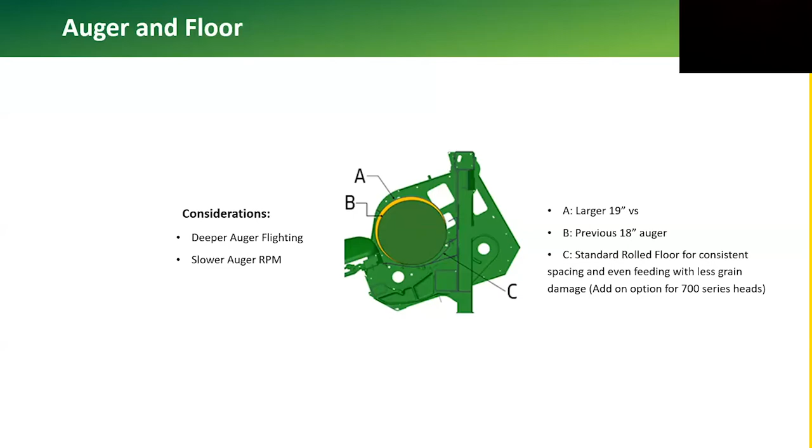Also, the auger turns slower than the older models for less grain damage, but still has the capacity for bigger acres per hour. Active end fenders will reduce ear loss in down corn and can be turned on or off from the cab as needed.

Also, easily raise and lower integrated end fender extensions for standing crops or down corn as needed. The redesigned frame-in-frame fold gives a lower profile and better visibility than previous models. Fold and go in less than 1 minute is a great time-saving feature.

Lighting enhancements include LED stubble lights, end shield lights, and lighted outer gathering points for less fatigue during those long dark nights of harvest. Factory integrated stalk deflectors feature easy installation, less added weight to the head, easy adjustments, and a reliable spring downforce.

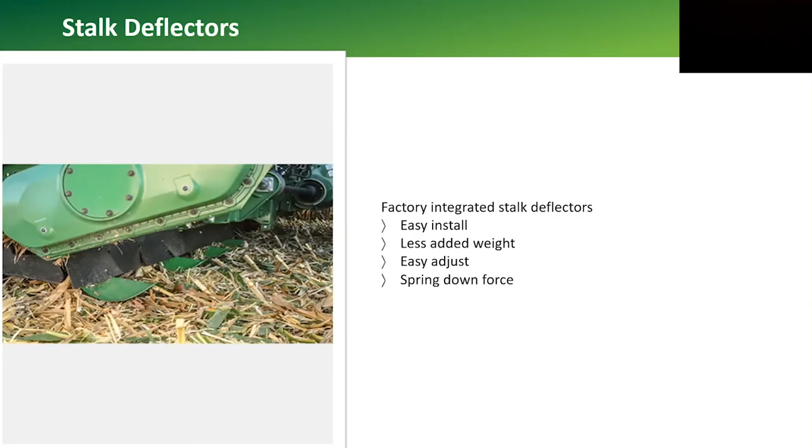The head we had for this demo was a non-chopping head with RowMax chopping stalk rolls. Residue sizing with these rolls is 50% of the material or more being sized to less than 6 inches, which creates less crop mat than a chopping head does, and a blossomed stalk top for fast decomposition while requiring less power than the full StalkMaster chopping head.

This may not be the best option for everyone in West Central and Central Minnesota, but may be a good option depending on the tillage practices and crop rotation, especially if horsepower is a limiting factor on your combine.

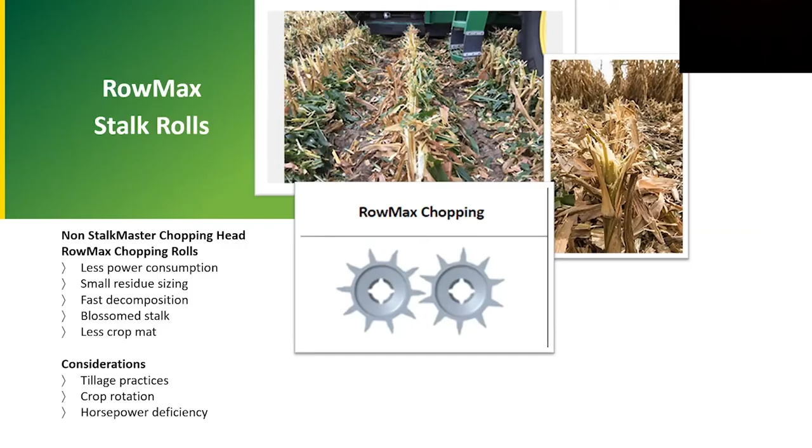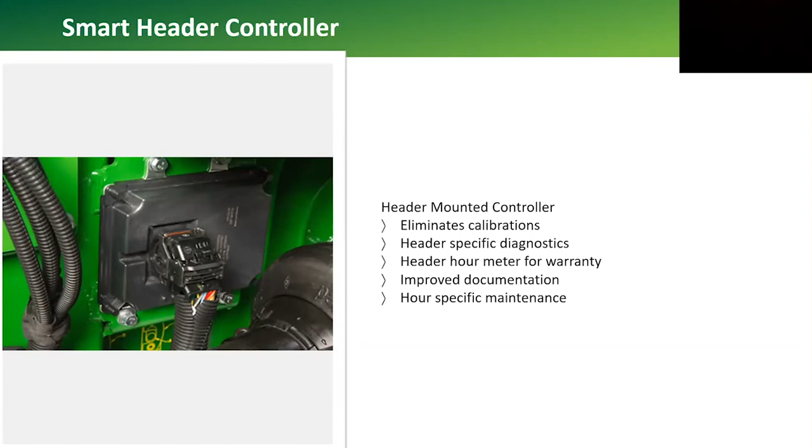The new headers to match the X9 series combines have a smart header controller mounted on each head. This will eliminate header calibration for each combine, help diagnostics with header-specific diagnostic codes, retain accurate header hour meter readings to allow better maintenance and warranty tracking, and also assure correct documentation inputs into the combine.

The all-new X9 1100 boasts higher bushels per hour, more acres per day, more efficiency per bushel, and improved grain quality.

Starting at the front, this combine features a 23% wider feeder house, a 4-strand conveyor chain, and repositioned slats for smoother transition of crop to the feed accelerator. A full floating center floor eliminates the front drum adjustment for more consistent crop flow.

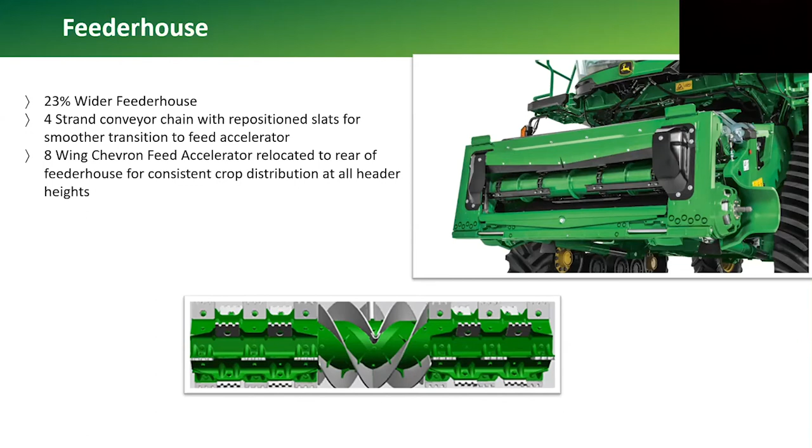Also, the 8-wing chevron feed accelerator has relocated to the rear of the feeder house for more consistent delivery of crop to the dual threshing rotors at any feeder house angle.

From the feed accelerator, we transition to the dual separator, which in this case is dual 24-inch rotors in comparison to an S700 series being a single 30-inch rotor.

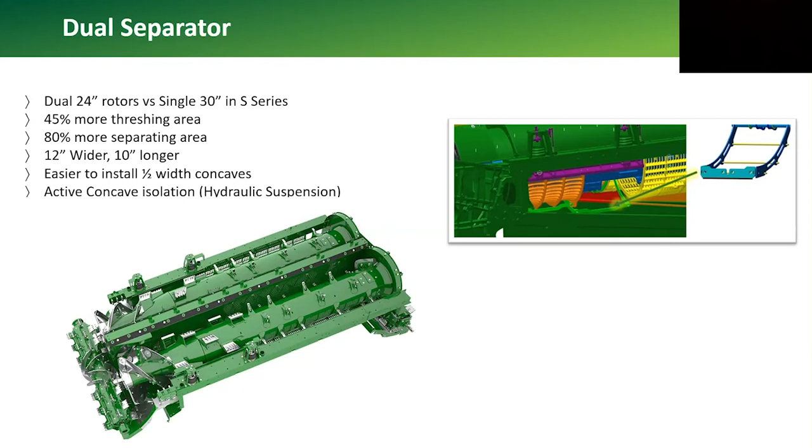This design increases threshing area by 45% and separating area by 80% by being 12 inches wider and 10 inches longer. Also incorporated is the active concave isolation, which is a hydraulic suspension system, and half-width concaves, making service and crop change easier.

The cleaning shoe also has some definite changes, like now using a 4-turbine cleaning fan versus a single large paddle style, and a front step pan replacing the shoe bed augers for an earlier start to the separation process. With a 36% increase in cleaning area over the S790, this is the industry's largest cleaning shoe.

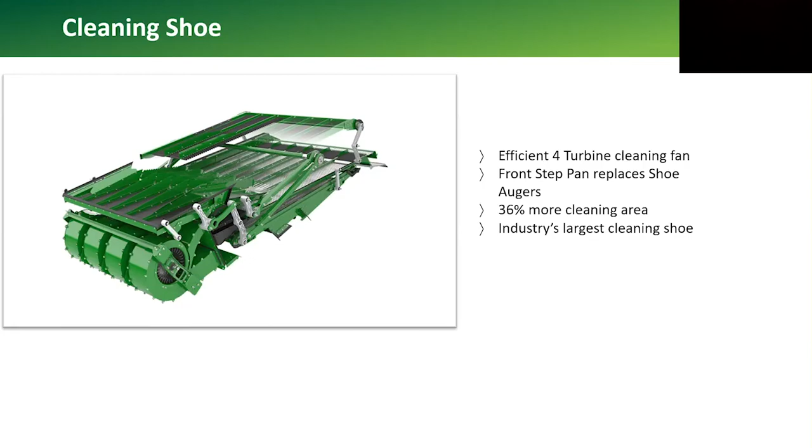With the large capacity of this combine, a large capacity grain handling system is also needed. 26, 28.5, and 31-foot folding augers are available with an unloading rate of 5.3 bushels per second, or 318 bushels per minute. Also, the system is sequenced with a 3-second differential between cross augers and the horizontal auger.

This will empty the horizontal auger at shutdown to reduce carried weight, and start cross augers later at startup to reduce startup load on the drive system.

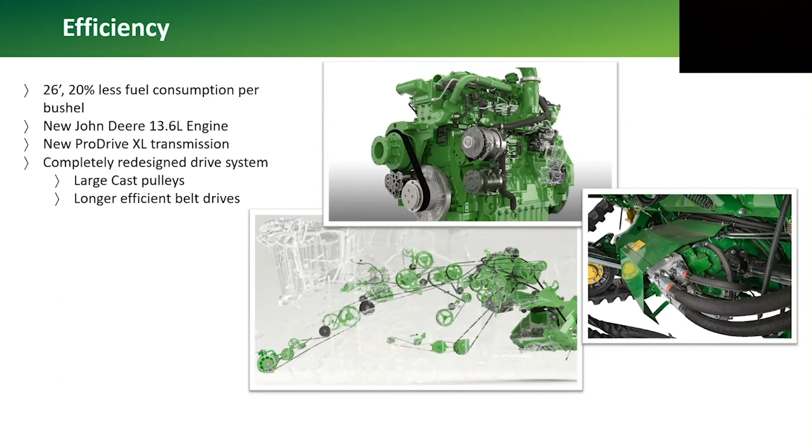Along with productivity, efficiency was key in the development of the X9. The combination of a new 13.6-liter John Deere engine, a new ProDrive XL transmission, and a completely redesigned separator drive system, which focuses on large cast pulleys and long, efficient belt drives, results in up to a 20% reduction in fuel per bushel harvested.

Comfort and visibility enhancements are enhanced with new lighting packages, new comfort and convenience packages, and the easy-to-use 4600 command center, and a convenient multifunction control lever.

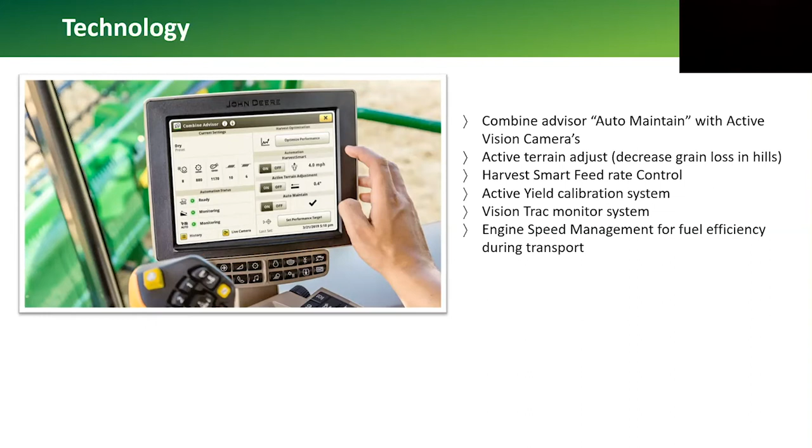Technology is built into this combine from front to back, with systems like Combine Advisor to automatically maintain your productivity settings and grain quality, active terrain adjustment to decrease grain loss going up and down hills, Harvest Smart feed rate to keep the combine full and efficient, active yield calibration to help keep the yield monitor calibrated in varying crops, Vision Trac monitor to keep the operator informed of changes, and engine speed management for fuel efficiency during road transport.

Last but not least is the service and support built into this combine. John Deere has built superior telematics into new machines that greatly enhance our ability as your dealer to maintain a high level of support. Your combine can be remotely monitored by you or your dealer with JD Link alerts, expert alerts, and the machine dashboard.

And we can more effectively assist you in operation, setup, and diagnostics with remote display access, remote programming, and Service Advisor Remote.

So here's what we actually experienced in the field, with our first day being October 19th. We received this combine late in the season, so our first demo day started out with less than ideal conditions: 34 degrees, light snow, and wet stalks, but at least no mud. The field was 200 bushels per acre average, 15% moisture, and standing well.

With these conditions, we were able to push upwards of 6 miles per hour, as high as 6.5, before reaching horsepower limitations. After a couple of stops to make and verify settings, we ended up at 400 RPM rotor speed, 30 millimeters concave clearance, 1350 RPMs on the fan, and 22 and 12 millimeter openings on the chaffer and sieve.

For those of you who remember your settings and question why the rotor speed seems very high, remember the rotor diameter is only 24 inches versus 30 in an S series, so a 25% addition is needed to obtain the same threshing tip speed.

This screenshot shows those settings plus 7,158 bushels per hour rate, 0.8 gallons of fuel per acre, and a rate of 31.8 acres per hour. This screenshot was probably a little higher yielding area of the field, as around 6,300 bushels per hour was more of an average seen on the monitor at these bushels per acre.

Although I was not around later in the day, as conditions improved and the stalks dried out, the operator was able to push even higher ground speeds, near 7 miles an hour, before reaching those same limitations.

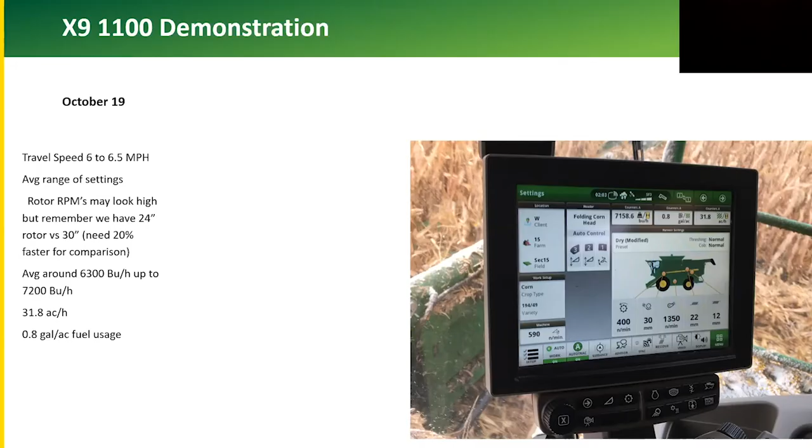So what did we see on the ground and in the grain tank at this level of productivity? Grain loss was very acceptable for both the header and the combine. Tailings levels were low. Many cobs were whole or nearly whole at the rear of the combine.

And the grain tank had a very clean sample with very little fines and nearly zero foreign material or broken cob. As a comparison, I have been using numbers compared to an S790, but in this case, we had an S770 in the same field. The S770 with an 8-row corn head was running nearly the same speed, slightly slower, 0.1 to 0.2 miles per hour less, and doing a very comparable job outside of a little bit more foreign material in the sample.

So the reality is that the X9 1100 with a 16-row head was doing slightly over double with a slightly cleaner grain sample and much more efficient than the S770.

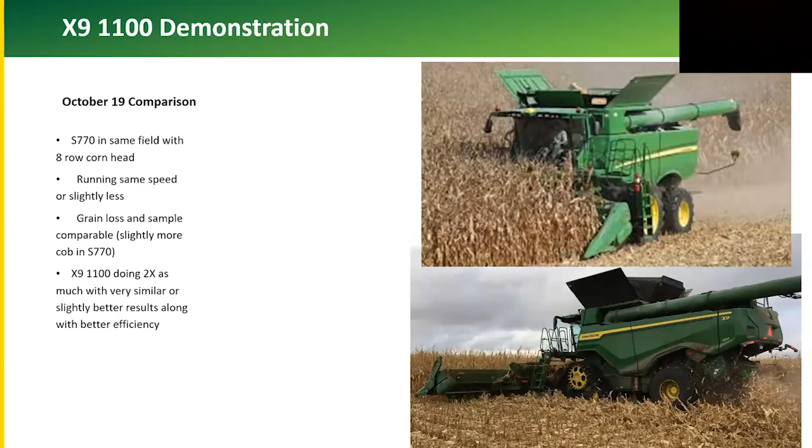More snow, and several days later, after snow melted off the stalks, we were able to move to our next location. This location had similar field and crop conditions, leading to very similar results. We also had the opportunity for several different operators and farm organizations to ride and drive and experience the operation of the combine.

This location gave us the opportunity for a better comparison, as we were running in the same field as an S790, which also had a 16-row corn head. At the end of the day, the customer told me he could produce 40 to 45% more productivity with the X9 1100 while achieving a much superior grain sample than he could with his own S790.

Our final location of demonstration came on November 4th at a location farther south in our coverage area, where we again had the opportunity for several different customers to get in the cab.

After our early snow had finally melted and the weather had turned back to a nice, dry, breezy fall day, we were able to find a field of corn that averaged around 230 to 240 bushels per acre, with a moisture content of around 17.5%.

We started on a full quarter and everything went very much as it had on the previous days, with the exception of the higher yields. It gave us the opportunity for higher bushels per hour than had been advertised for the X9 1100.

With these yields, we were able to reach over 7,000 bushels per hour more consistently. As the day progressed, the conditions became drier, and we did run into some issues that made a difference in our capacity. With stalks starting to break off and running higher amounts of material through the combine, we tried adjustments to the deck plate spacings, feeder house speed, ground speed, and other things with little or no change.

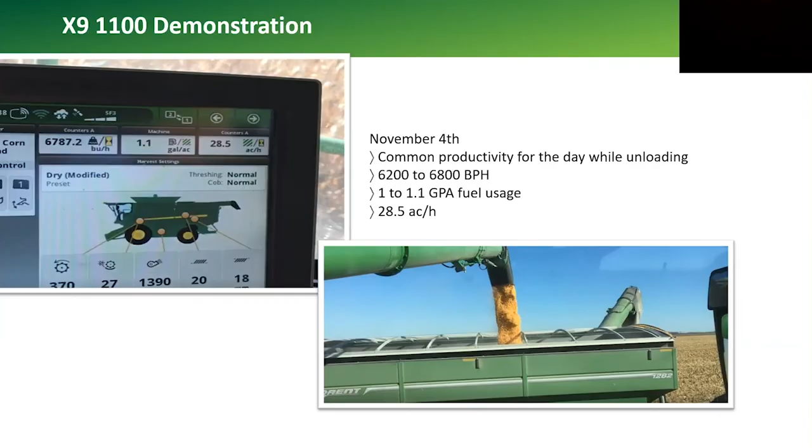Without unloading, the numbers would increase to 6,900 to 7,200 bushels per hour, 35 acres per hour, and the fuel usage would decrease to around 0.9 gallons per acre.

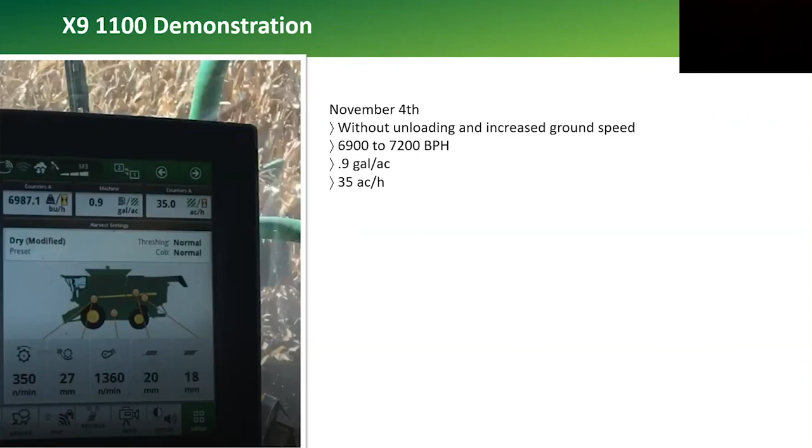Again, our grain quality was very good, but we did see a few leaves and broken stems in the grain sample because of the high amount of trash intake and busting up the extra stems. Grain loss, even with this amount of extra material, was still very good, but we were getting close to the limit of separating capacity as well.

As far as the chopping stalk rolls, they seemed to do a very good job of sizing and crimping the stalks no matter what conditions we ran this machine in.

My overall impression of the corn head is that the folding frame was very quick and efficient, with good visibility for safe road transport. The gathering and feeding was good, with the slow turning auger being noticeable in keeping good grain quality while still maintaining capacity for these big numbers.

The factory stalk deflectors worked well, and we did not run at night or in down corn to see the effect of the lights or active end shields.

As far as the chopping stalk rolls versus the Stalkmaster chopping head, I would have to say that there were definitely mixed group opinions. Some farmers thought they were good, some farmers thought they were not enough.

Crimping and sizing of stalks was consistent, and for some customers, that's the tillage practice they may be looking for. But for other tillage practices or crop rotations, the Stalkmaster chopping head will remain their choice.

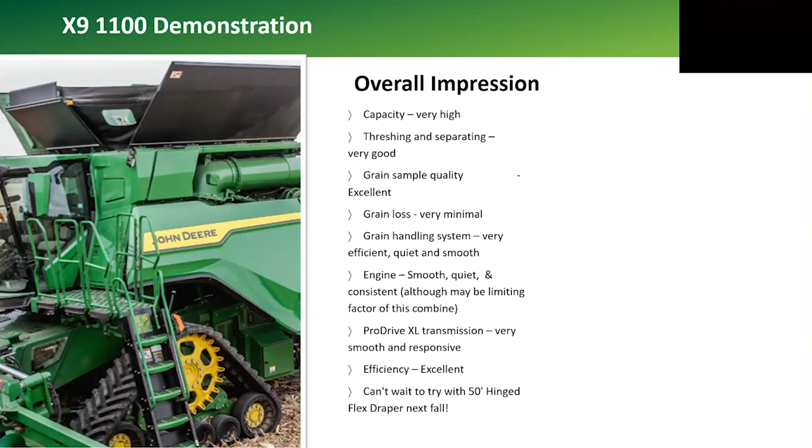Everyone that I talked to was impressed with the capacity and grain quality, as well as features of this new combine and head. So although large capacity combine demos in corn can be a logistical nightmare, and we started with some unusual early Minnesota snow, I still believe the hours spent and information gathered were very positive for the X9 1100, our customers, and Midwest Machinery.